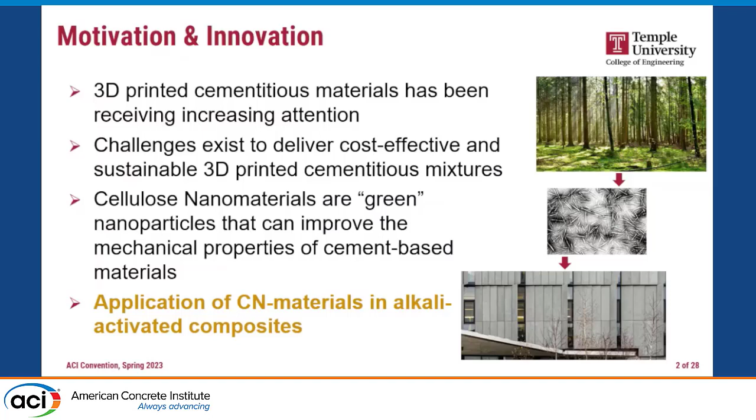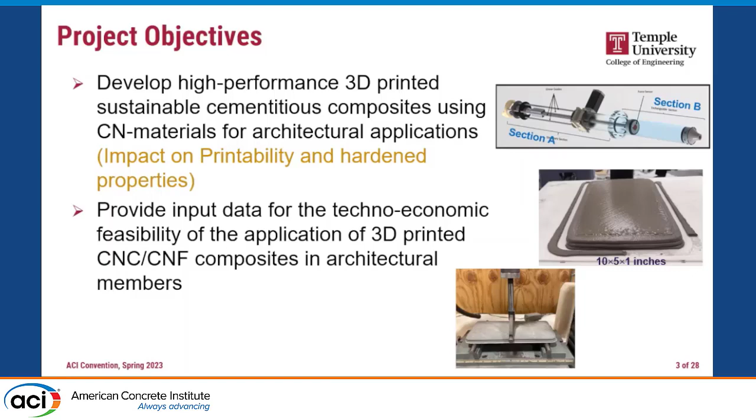So the objectives, as I said, are developing the mix design using these cellulose nanomaterials and looking at the impact on printability and hardened properties. Also, our collaborator from University of Wisconsin-Madison is using this as input information from our experiments for techno-economic analysis, to see if this is feasible or not.

Background on cellulose nanomaterials: mainly we use CNCs, or cellulose nanocrystals, in this study. Some other people use CNFs, cellulose nanofibers, in concrete, mainly in mold concrete or traditional concrete. These are the crystalline part of cellulose, typically extracted through a hydrolysis process using acids.

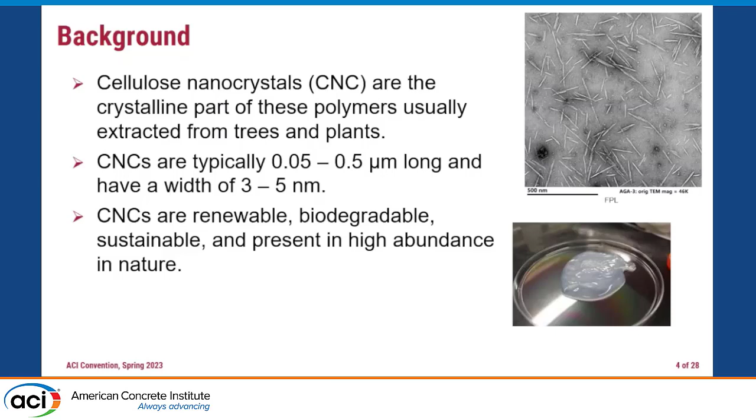Regarding size, as you can see on the upper right side, the width is around a few nanometers, and the length is around 50 to 500 nanometers. The large benefit of using CNCs is that they are renewable materials, biodegradable, and sustainable. They're even currently used in the cosmetic industry and the food industry, so they are very safe, and we have them in high quantity in nature. These are really great benefits from using these materials.

So here are the research scopes. I'm going to discuss how we designed the mixes, the impact on the fresh properties, and then the performance.

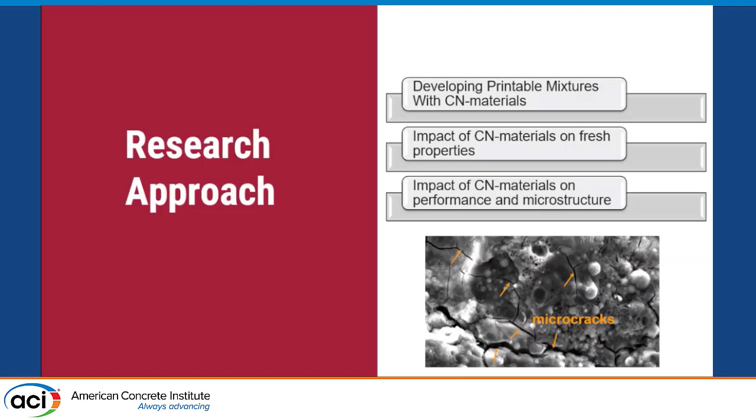As we know, there are some challenges for developing the mix design for 3D printing compared to traditional concrete, considering our limited experience with this. For extrudability and printability of these systems, we consider these parameters: basically, extrusion consistency, which we measure using extrusion force.

As you can see at the top right side, we use a similar system as discussed earlier: a syringe system where, by displacing the ram, we can look at how the pressure changes over the print time. There's also splitting and tearing, which you're familiar with, and this is not an acceptable system. Regarding buildability, we looked at how many layers we could stack.

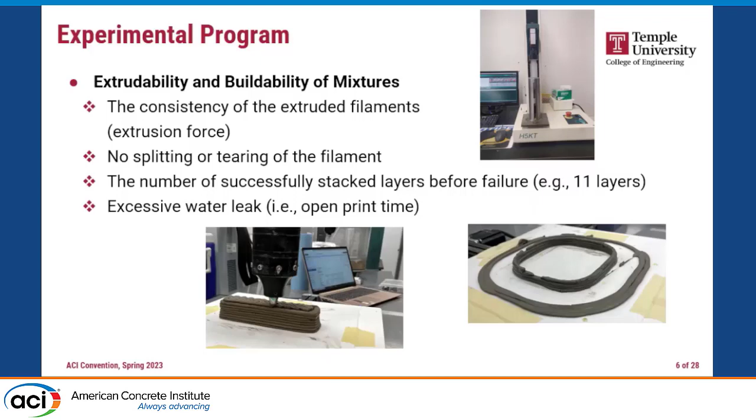Since we were interested in printing a 2-inch by 2-inch geometry, we printed around 11 layers, and if we didn't see extensive deformation, that was acceptable for us. In some systems, we also saw excessive water leaking from the nozzle due to separation of the material, so that wasn't a printable system either.

Based on those criteria, we developed 8 different mixes. At the top table, you can see the OPC mixes, a control without CNC, and then different percentages of CNC by volume of the cementitious material. At the bottom, you see the alkali-activated system, again with a control and different CNC proportions.

In the case of the alkali-activated binder, we used a mix of class F fly ash and slag — 70% fly ash and 30% slag. I'll discuss how we came up with that number. The CNCs were in aqueous suspension at around 11% solids, and for the activator we used a combination of sodium hydroxide and sodium silicate.

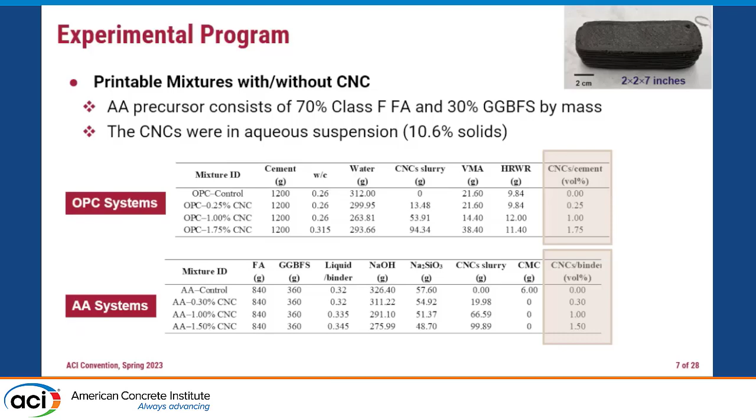This is our printing setup. On the left side you see the printer. We designed it with a plug-in system so we can easily plug it off, load the material, consolidate it, and put it back. This gives us a lot of flexibility in open time — it extends our open time.

Here you see an example of the printing, 2 by 2 by 7 inches. So we can cure the samples and cut them for compression or flexural experiments.

After printing, regarding the printing pattern, the outer or perimeter layers use more of a straight line, while the infill is more zigzag. The main reason for this is that we got better dimensional stability from this pattern.

After printing, we cured the OPC system samples for 28 days inside water or calcium hydroxide solution. For the alkali-activated system, we adapted two different curing methods: the first was sealed curing for 28 days, and the other was heat curing at 60°C for 7 days.

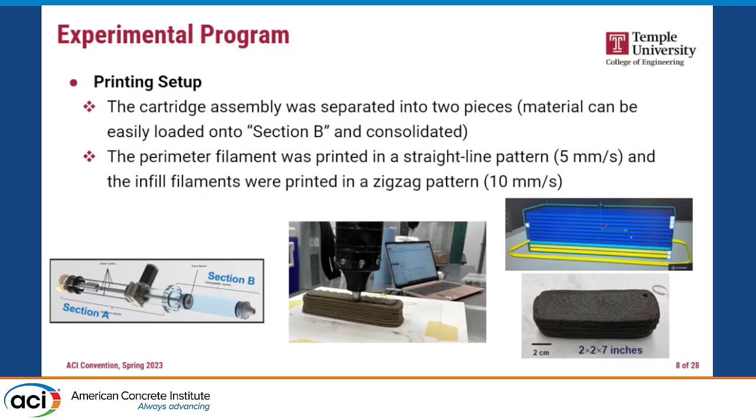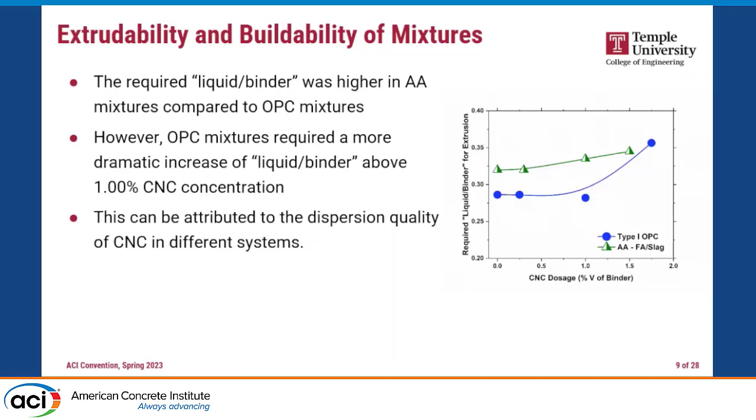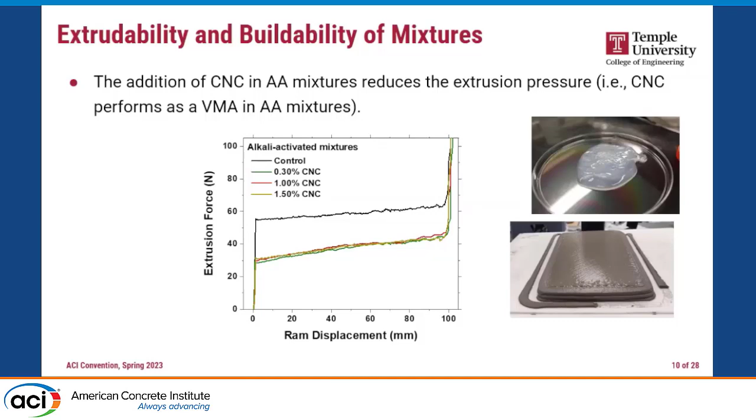Regarding the pressure, I mentioned to look at the consistency. So this is the example you are seeing here. We have alkali activated without CNC, with CNC. The use of the CNC lowers the pressure a lot, and this works as a viscosity modifying agent as well as a high range water reducer in the alkali activated systems.

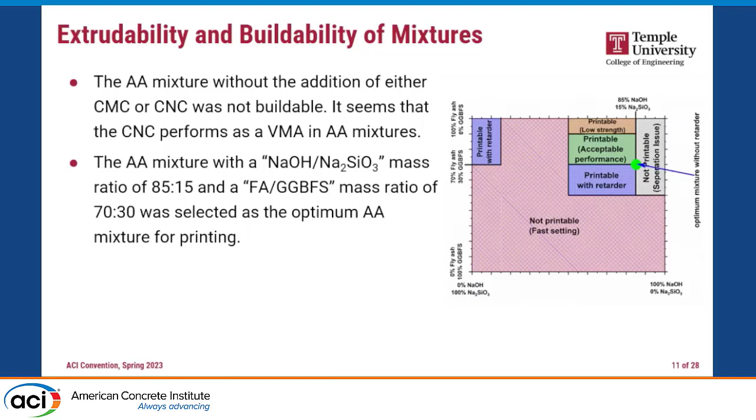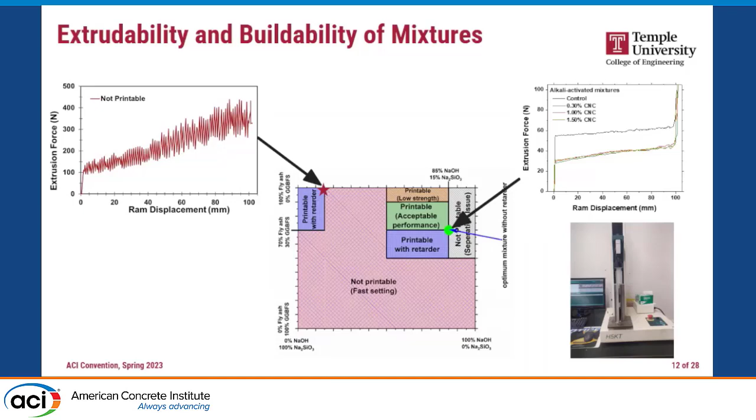If we look at this by the pressure graphs, you see non-printable system at the left side here, right? This very high pressure requirement, and you have a hard time to extrude this through. At the right side, these are the optimal mixes I mentioned.

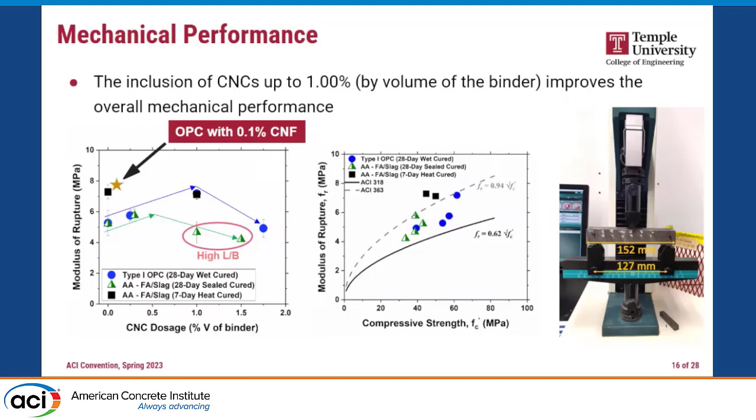And that's a CNF mix we tested. Even CNF mix with 0.1%, it showed very promising results, 30 to 40% increase in the modulus of rupture.

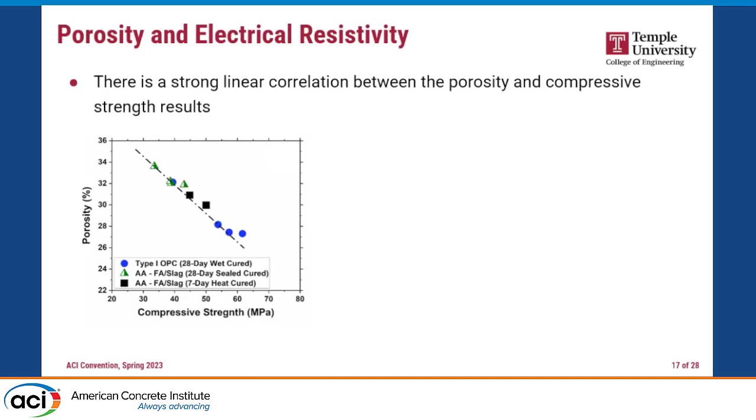We looked at the porosity of this system. There's a strong linear relationship between the compressive strength and porosity. For electrical resistivity, we saw some abnormalities, and we think this is mainly due to the leaching of alkalis from the reacted and unreacted phases in the system. That's why we are seeing a higher electrical resistivity for alkali activated versus the OPC.

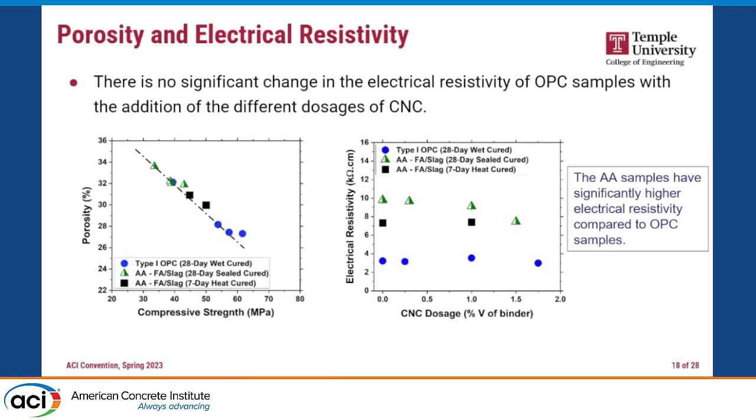The other interesting observation we had is the internal curing effect from the CNCs. When we are looking at the bound water over the depth of the samples, we are noticing in the OPC system there is an increase in the degree of hydration. So this can be really helpful in 3D printed systems when we have lower permeability, right? The external curing effect is limited, or the depth is limited. So this is an interesting observation we had.

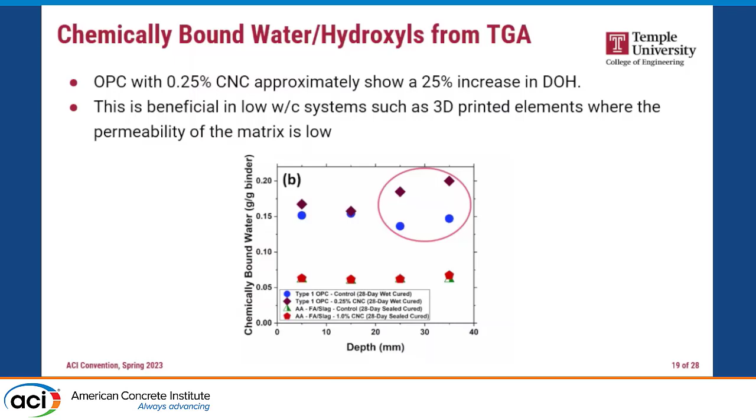But in the case of the alkali activated system, there's no impact on the reaction, which was understandable. I'm going to skip this one.

We looked at the SEM images after the flexural experiment. At the left side, alkali activated seal cure, right side, alkali activated heat cure. You see a lot of cracking in case of the seal cure, which makes sense, right? We have low strength for the seal cure one. The main reason we observe here is due to the heat curing, we get higher dissolution of the fly ash particles as well as the slag particles, and we get a more cohesive and uniform structure. So even unreacted fly ashes or slags are embedded inside that matrix, which helps improve the strength of the system.

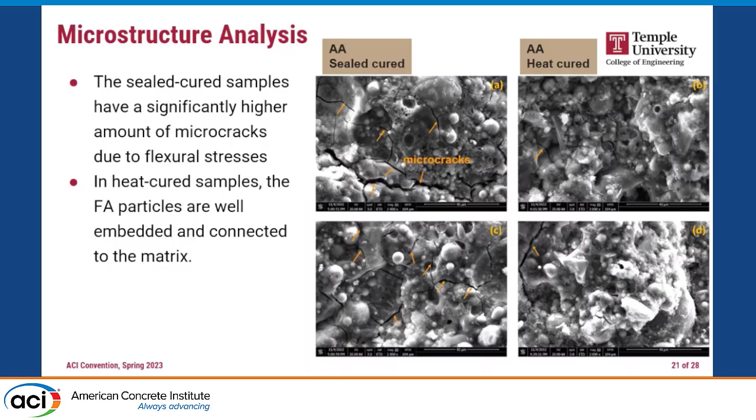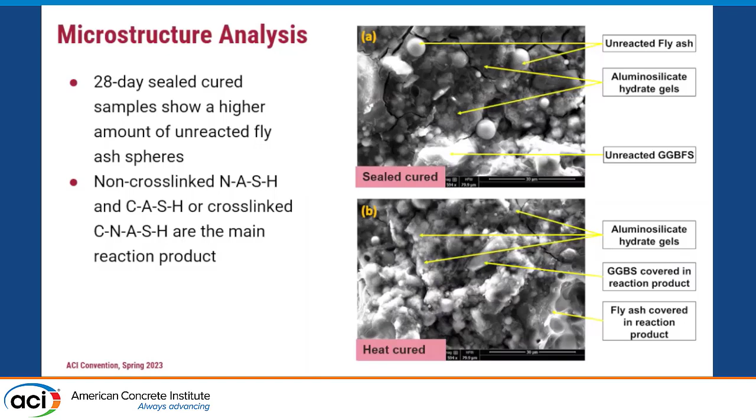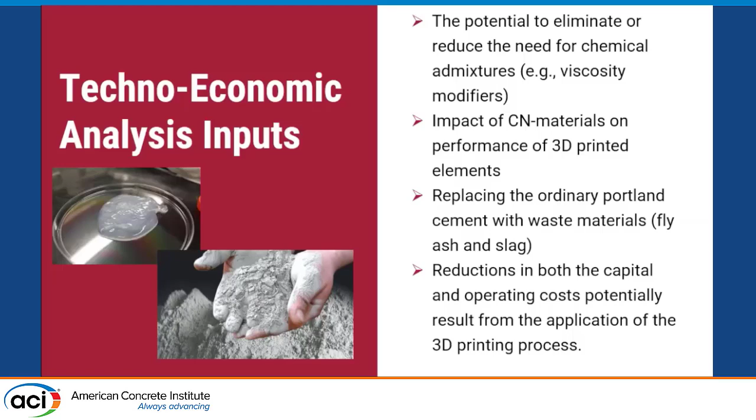So as I said, we introduced some of this as input for techno-economic analysis. I'm going to skip this one due to the time limit.

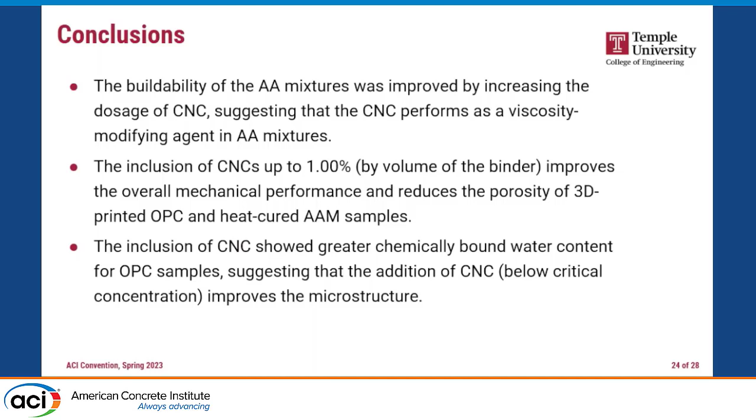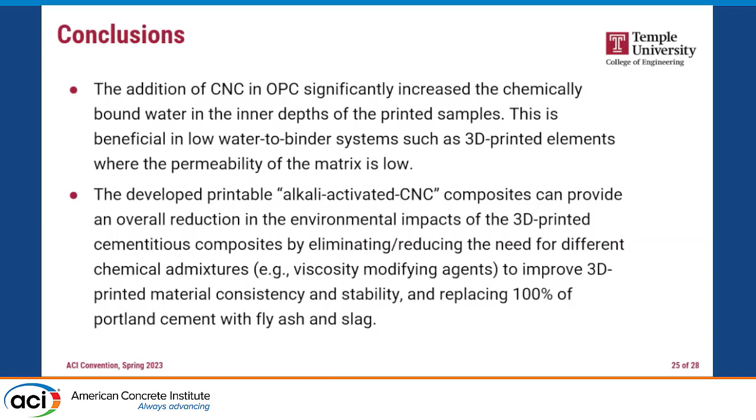So these are the conclusions. CNC can help to improve the printability of our alkali activated and OPC system, works as a VMA, and also CNC improves the mechanical performance and the internal curing effect, and finally the sustainability part, right? It can really work as a sustainable system. So with that, I thank you for your attention.